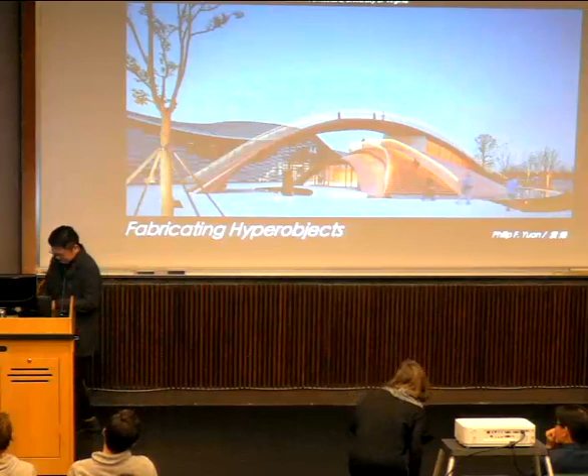Thank you so much for the generous introduction from Dean Ila. Good evening, everyone. It's a great honor for me to be appointed as Thomas Jefferson visiting professor at UVA, and thanks to Dean Ila for your kind invitation. I really appreciate your vision, leadership, and support, not only for the new development of digital technology, but also the important cultural communication in architecture.

I would also like to thank Professor Li Shiqiao and Esther Lawrence for their special hosting. Shiqiao is admired as the first and best Chinese scholar who graduated from AA in the 1980s, a glorious time there, and he has a profound influence in mainland China, especially on Asian architecture and urban theory. I also thank Philippe for organizing the studio and inviting me to teach here this semester.

So it's a great opportunity and great honor for me to teach with Lucia. I think we have a fantastic studio, and we just finished the review. The students worked so hard - I'm so proud of all of your work.

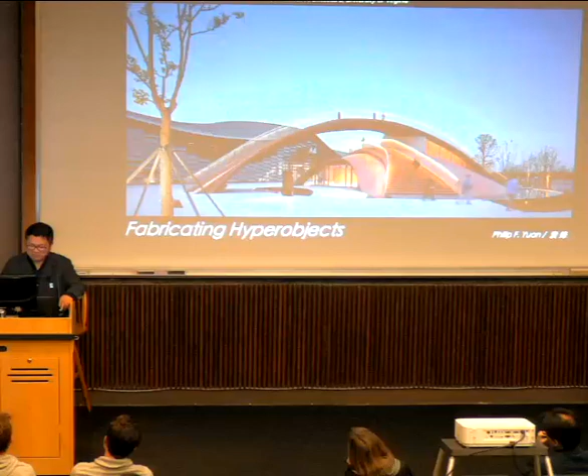10 years ago, I worked as a visiting scholar at MIT with Stanford Anderson, and we drove all the way to UVA. That was the first time for me to visit this great campus, which witnessed Thomas Jefferson's understanding of pedagogical campus space and the relationship between the human and natural - a very special prototype globally. This morning, I especially visited the great Monticello, which I hope will inform this lecture.

15 years ago, I founded Archi-Union Architects in Shanghai. Our office is a kind of representation of our understanding of how we would like to set up the relationship between us and the Shanghai urban culture. As the ivy grows in the outer courtyard of the office, we progressively make our dream through the expansion of this physical space.

The garden embraces the office, and the office also embraces the courtyard greeneries.

In ancient China, a garden is not only a physical space for leisure, but also a dream space reflecting a holistic view of harmony between body and nature. Ji Cheng, a gardener of the Ming Dynasty, in his book Yuanye, proposed concepts such as borrowing scenery and adapting to local conditions, representing this holistic view of human and nature. A garden is not isolated from the outside world; rather, it is an extension of limited human space, forming a continued artificial connection between the human body and the surrounding world.

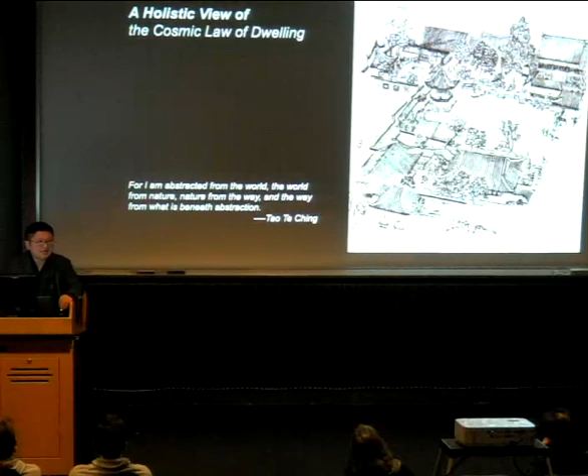Dian Chunyi is a garden inside the Master of the Nets Garden, which, although not the largest, is one of the most representative gardens in Suzhou. The Metropolitan Museum also has a version of this garden, named Ming Xuan, reproduced on the second floor in New York City. Recently, Luca Molinari, former curator of the Milan Triennale, curated a special contemporary exhibition in this garden, which I was also involved in.

Through robotic plastic printing technology, we created an artificial stone and embedded it into the context of Dian Chunyi. In this view, we can see three different rockeries from three different time periods. The middle one is real, a naturally formed Taihu rockery from the Ming Dynasty. The upper one is an artificial craft stone made during the Republic of China period. And the lower one is from our exhibition, made using recycled plastic.

We were thinking about this kind of post-humanism, what we can produce right now as part of the traditional Chinese garden. We implemented robotics to print this big rockery in just two days. By engaging in the continuous making process of the garden, we wanted to propose a contemporary view on the relationship between the artificial and the natural.

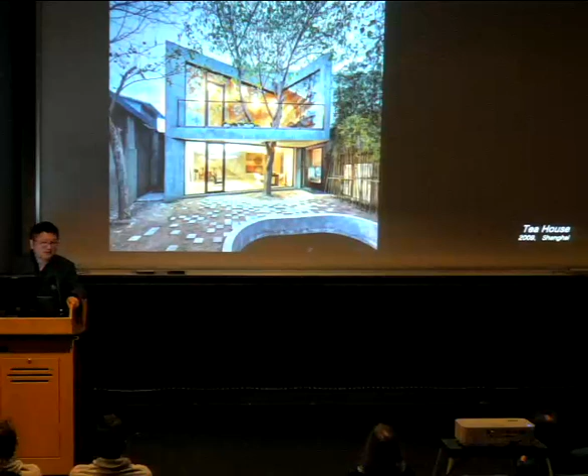Here is another story about the tea house, located in the backyard of the Archi-Union office, constructed in 2009—almost 10 years ago—from the salvaged parts of the original warehouse's collapsed roof. The site was extremely restricted, with a wall on three sides and only one side facing a special pond, where there was one tree. We did not cut down the tree; instead we tried to design a relationship engaging the new building with this original tree.

On the ground floor, the space faces the trunk of this big tree—you can see a very big trunk from the ground floor of the tea house. On the second floor, you experience the shadow of the leaves and the sunlight from outside, almost touching the leaves. There's another back space where you can see the leaves falling down onto the balcony on the second floor. It's a super small building, only about 120 square meters over 2 stories, but we found three ways to create a special relationship with just one big tree.

The interior space is interesting—we tried to embody harmony by integrating exposure and openness, a delightful space, logical construction, and other complicated relationships, with the building reacting to the site's environment. The main object in the tea house is a stair, integrating circulation with the background wall, which is also a stair, maximizing the amount of space and letting you experience the tree differently. It's one big object that, although in a super small space, dominates it and gives this small space a new spirit and new identity.

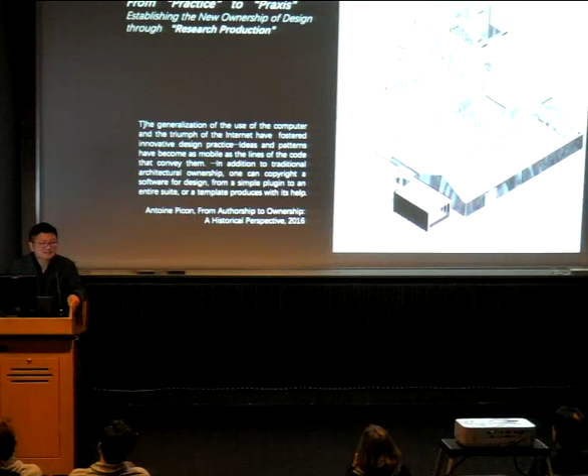It is supposed to be not just an architectural office, but a research laboratory as well. I'm trying to propose an alternative vision on architecture authorship, which could be established not just through design projects for the office, but more through a model of research production. In this sense, the traditional definition of architecture practice would be transferred to the praxis — a design application of knowledge.

In the past nine years, working together with Neil Leach, we've been setting up a particular research platform named DigitalFUTURES Shanghai, which is a PhD program, workshops, conference, and exhibition-based event. Every year we invite six to twelve teams tutored by experts from all over the world, including Philip Beesley, Tom Mann, Philippe Block, Achim Menges, who have been intensely packing everything, teaching together in two to three weeks, focusing on a certain research topic in computational design and robotic fabrication.

I think it's kind of a learning progress. Achim's team has come for five years, and Philippe Block for three years. I think it's a very interesting event — everyone teaching each other, learning from each other, sharing knowledge with each other. It's a totally open platform to all the community, the society.

So you can see the number of participants is increasing. The first year we only had 30 students participate in this event, but year by year the number grew bigger. This summer, four months ago, we had 220 students from 126 universities from all over the world participate in this special event. Our global partners who teach here number more than 40 teams, including from North America, South America, Europe, and Australia. So we're sharing this kind of open culture with each other — it's a great honor for us to have this special event.

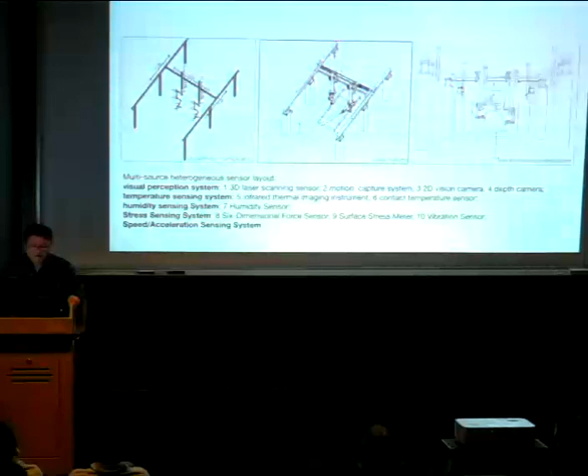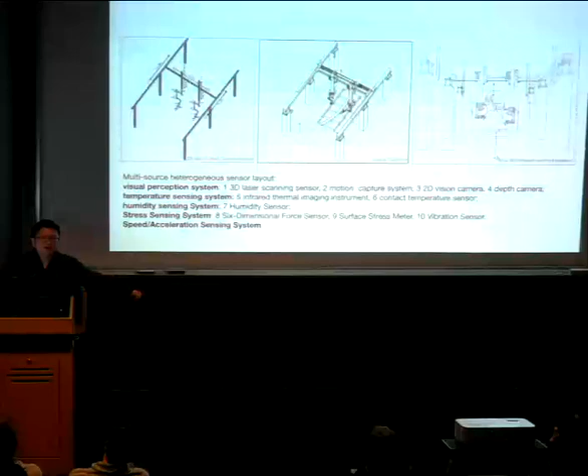I think the essential part for this is the spatial configuration, from configuration to the robotic platform, and we also put more than 10 different kinds of sensors into this platform. It's like robotics, like the extension of the human hand. You have 2 hands. One hand can carry 125 kilos, and the range of it is like 10 to 12 meters. So it's expanding the scale of the human body.

And we put sensors in it. It's like you have eyes, you have skin, you can touch, you can have real-time feedback. This is extremely important. This platform is expanding the human body in the construction, the experimental construction process.

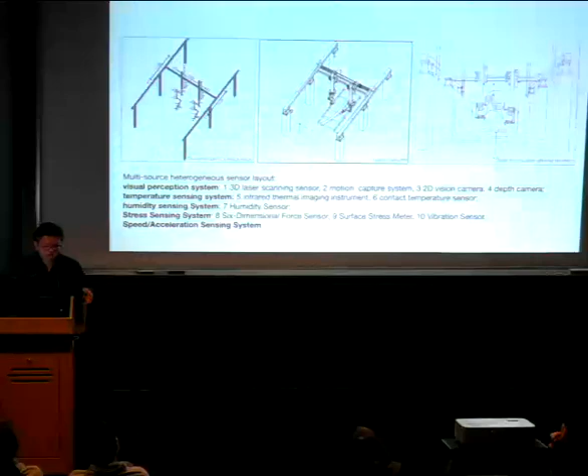And also some other theorists and philosophers coming, based on the theory of artificiality, astronomy, and automation, Benjamin Bratton's terraforming envisages a total transformation of the Earth's cities, technologies, and ecosystems.

The project takes a position of blurring the boundary between the artificial and the natural. It treats urban scale automation as part of the living ecology, and considers the city as a planetary network by which humans occupy the Earth as a surface.

In a way, we try to outline a planetary design initiative for the next century.

Stiegler, I invited him to come to Tongji 3 times and teach in our PhD program. And he's sharing a similar holistic view.

Stiegler addressed the globalization of exchange due to global communication networks, the worldwide internet, the GPS system, and the cloud, etc. He sees the network as a planetary infrastructure allowing the permanent interconnection of 2.5 billion individuals, whose activities are systematic traces treated by intensive computing.

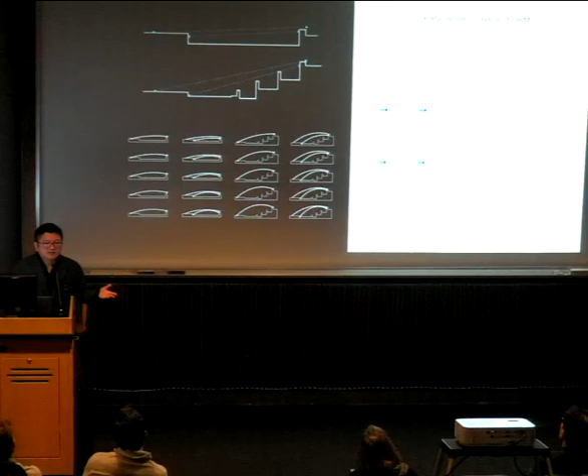The catenary is developed by the structural engineer, but architects right now can implement it in the design process. Then we use Millipede, which is a structure optimization software, based on topological optimization methodology, to remove unnecessary material in the construction.

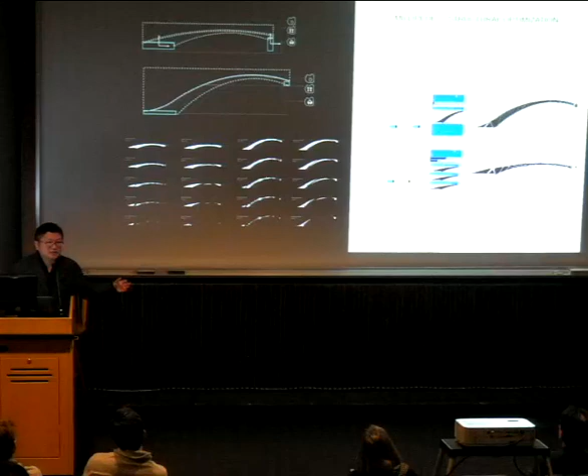To do that, we also need to set up boundary conditions and remove the unuseful material, and finally we find the useful material. Most importantly, we implement robotics and 3D printing, the forces followed by the density of the material, and the print material is the structural material. This is totally based on parallel fabrication on the university platform and also the Fab-Union platform.

This is testing, Patrik Schumacher coming into our workshop. We're working through it. This is the first year standing on it. Maximum we're standing 5 people on this plastic bridge. It is a pedestrian bridge, totally done by my students.

But because of the hot weather, unfortunately after 45 days that year, 2017, it was extremely hot in summer, 42 degrees. We were testing it, detecting every day. The top of it was like 72 degrees, and the bottom of it like 39 degrees. The temperature difference made a huge transformation in the geometry of the bridge, so it broke down. We learned a lot through this failure, the first year.

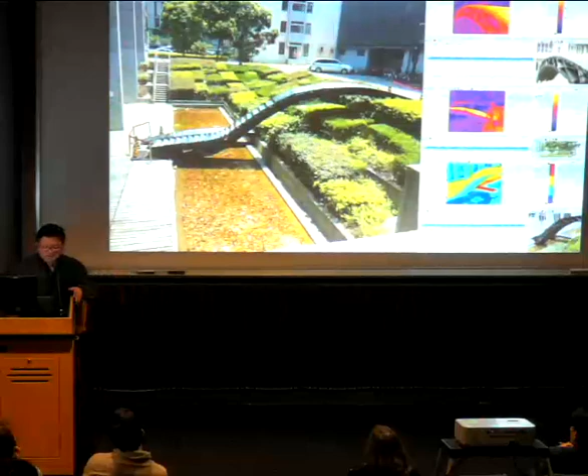And this is the second year, 2018. We actually invited Wang Shu, who is a Pritzker Prize winner, and Meejin Yoon and Nader Tehrani coming to make keynote speeches at the Digital Future event. How many, 7 people standing on it. This is a totally updated version for the efficiency of the bridge.

The technology we implement this time is 3D welding by robotics. It's like point-by-point welding, with a structure optimization system optimized by different softwares. It's interesting, everything finished in two weeks and a half. This was a workshop for making this special bridge.

And Wang Shu told me he is very interested, maybe not in the process of how to make it, but he is interested in this kind of detail which has a certain quality of craftsmanship, totally done by robotics. It looks not precisely accurate, but has this kind of very interesting detail. It's not made by a human being, it's made by a machine, so it's a collaboration between robotics and the human being. That is what we name cyber.

It's a cyber future. This is this year. You can count how many people are standing on it. So it's a learning curve, right? Over 3 years, from 5 people to like 20 people can stand on it.

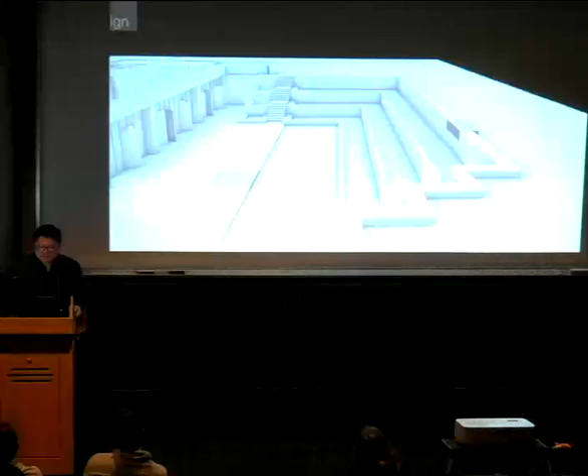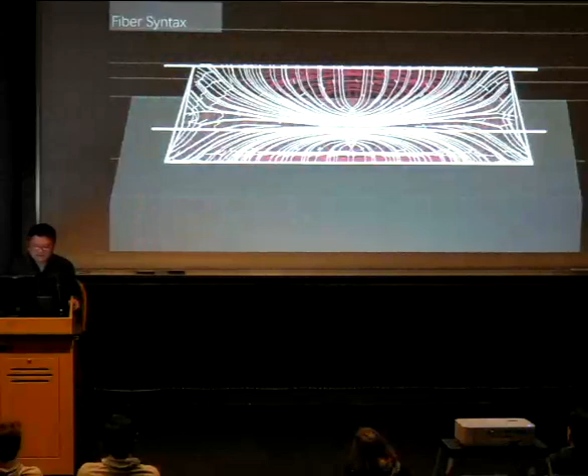So it is not one material, we use 3 kinds of material, including steel metal welding, carbon fiber, and glass fiber. So it's an integrated material. The robotic 3D metal printing offers more freedom back to the designers, with excellent strength-to-weight ratios.

And this is a weaving for each local step, 3D welding and robotic weaving. With excellent strength to weight ratio, and scale limitation determined by the robotic reachability as a production method, robotics filament weaving technology becomes a great method for the geometry of local structures like the stairs and the handrails.

Through the composite structure, the joints research aims to maximize structural performance and minimize material usage. So the weight of the bridge is only 450 kilos, but 20 people can stand on it, so it's an extremely high performance bridge.

You can see we invented all these tools, and the whole process is simulated and fabricated by the robotic platform. It's carbon fiber for the compression and glass fiber for tension. This is a gantry robotic system. We record the whole process, and all of it is done by the students, the graduate students.

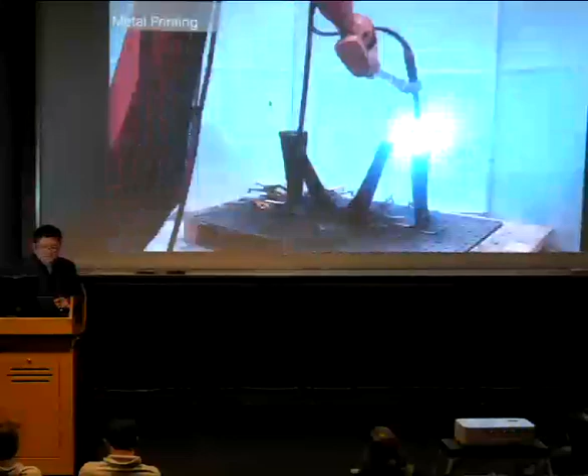All the segments are pre-assembled into 3 parts, the stairs - actually we have 18 stairs - and then we put them together before the final day. So you can see the details, and also you can see this kind of welding detail made by the robotics.

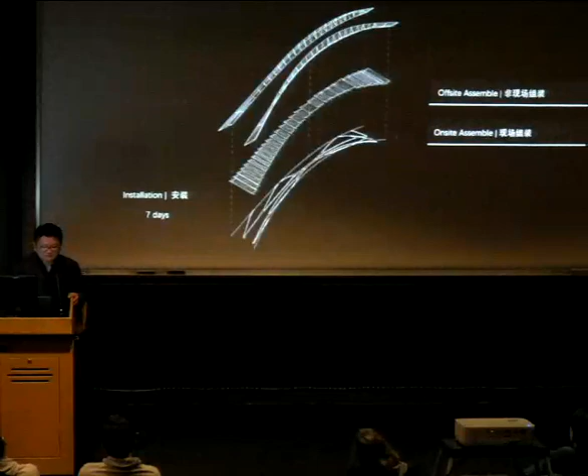So it's 3 layers. We have a support system, which is 3D welding, and now we have the handrails and the stairs, right?

So it's a skeleton with different kinds of muscles on it, like 3 layers of a system. We do everything very intensely in 2 weeks. We fabricate them in our school. It's like an event, a special event every year to present our research and our special tests through the same topic of research.

So this one we name like one object. You can see the material and the details are totally recreated and fabricated by the material performance, right? So the bridge created by different material is actually a totally experimental research process.

So the ultimate objective of research is to experiment, and through experimentation, to establish a kind of credibility, so as to analog the scientific laboratory, the design laboratory would lead to a rethinking on the traditional authority of architecture design.

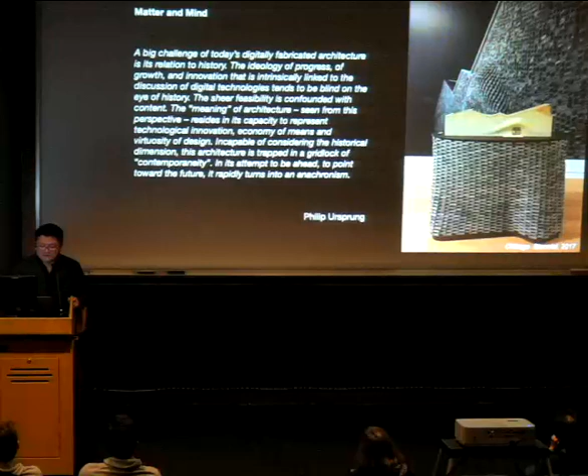Professor Philip Ursprung, who is the dean of ETH, recognized this project as a piece of matter and mind, as he mentioned, because he can read not only the technology but also the culture, some cultural aspects.

So the most important thing, we put sensors on the robotics, which scan and recognize and provide real-time feedback of the unique characteristics of each non-standard recycled brick, which helps us precisely place each brick to achieve the global geometry form, piece by piece.

The coexistence of roughness and accuracy is what we would like to express during the collaboration between human emotions and machinic intelligence.

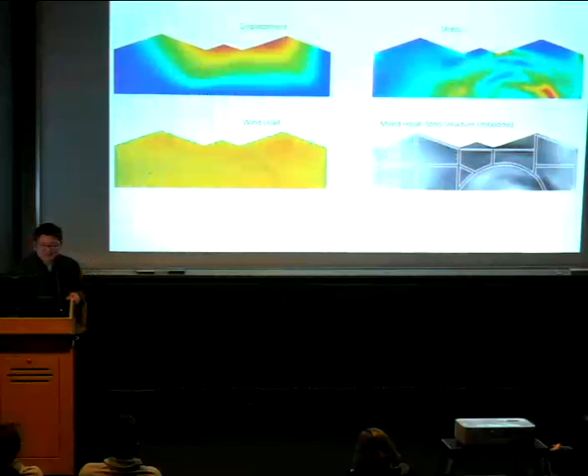So the most important thing, we program everything, every piece of the stone, totally based on simulation tools. You can see the displacement, the stress, and also the wind load, which are all parameters translated to the density of the material. We translate that density to position them in different places using robotics.

So the interior space has light and a very small footprint, but we find special quality based on this connection to the context. Another project with this kind of continuous gradient changes is the Fab-Union space.

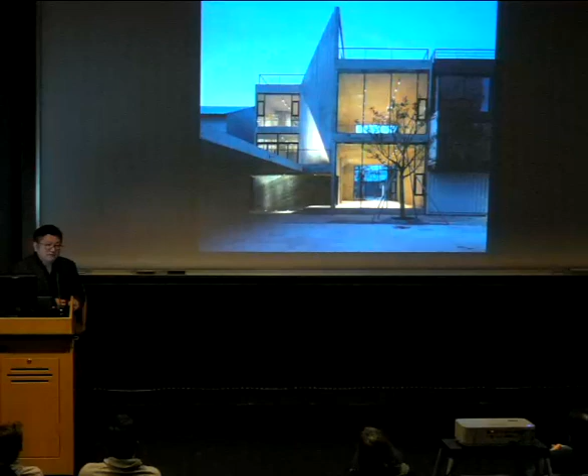The Shanghai government developed the West Bund, which is a very popular space right now in Shanghai, and gave 5 architects and 5 artists special spaces, and we organize different events there. We can use the space for 5 years, so it's an interesting special event in Shanghai. Fab-Union belongs to our team, so we actually set up a lot of exhibitions there. Everything was constructed in 4 months, including design.

So it's extremely short time. The space comes from the program. Actually, we have 2 higher spaces, a 5-meter space and a 3.3-meter space, and we just gave 3 meters in the middle to set up the circulation and the very special space in the middle to design everything.

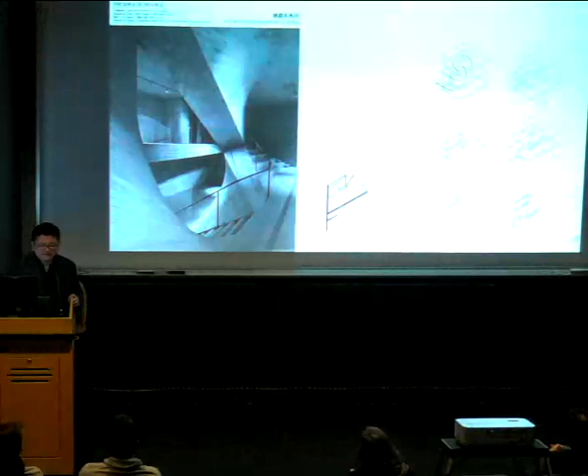So this is the circulation. We integrate all the different kinds of platforms. The most important thing, teaching my students in the studio, is to use the same methodology.

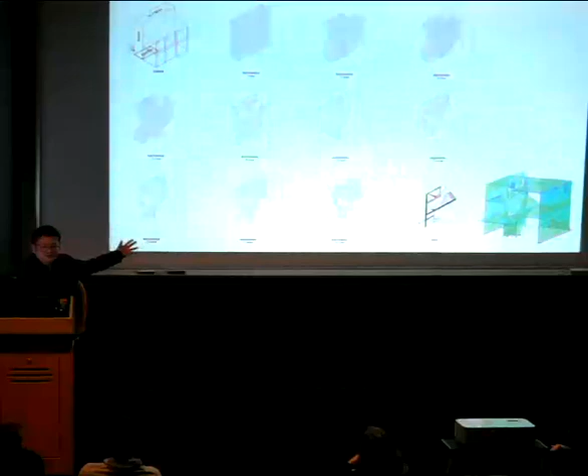We use Ameba to optimize the structure, deleting unuseful concrete generation by generation. The iteration has 84 or 82 generations. Afterwards, we translate this kind of geometry and polish them into a support system.

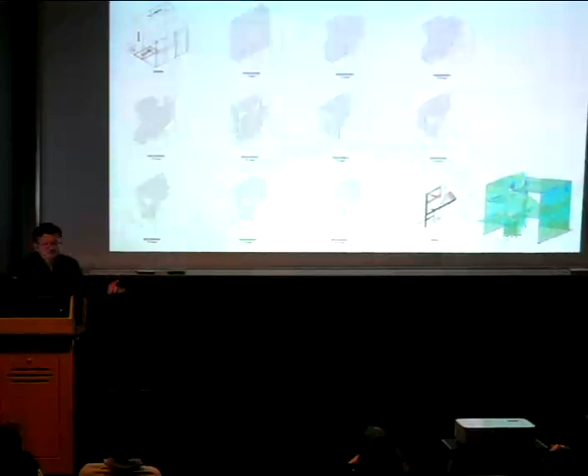And the bottom right is traditional structure software to prove what we're doing is right. So with Ameba, it's totally new software, but we optimize and delete unuseful material and try to create a new kind of experience space inside.

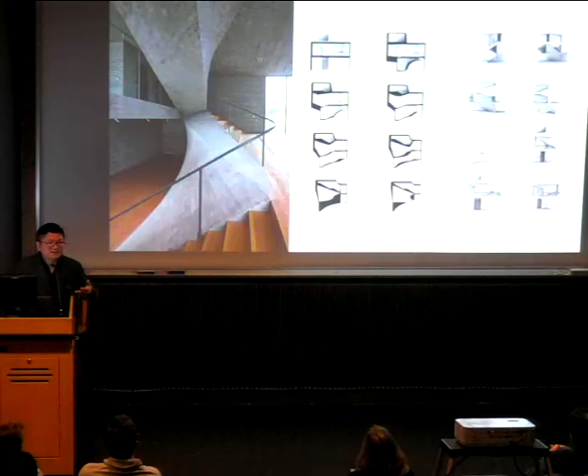So the construction process is really complicated in a very short time. We made a lot of sections, but the workers cannot read these kinds of sections. The only way to teach them how to construct it is by models, actually. So the plans are difficult to position, but spatially, just using models, we teach them on the site.

So after construction, you find the space quality is totally different. The wall is maybe not just a straight wall; it could be like a folding curvature wall because the forces are flowing. The support point is here. It's like a big diagonal linear space which supports the second floor. And the second floor is something like this.

We have outer space and some stairs inside the big volume, so it's like a transform from one point to the other. It's totally redefined the space by the structural performance. I like this image because we have light washing the concrete from the right hand, and on the left we have a parallel light also washing the concrete. Although the space is extremely small, just 14 meters, we have two kinds of light and a very special structure system, which gives us a totally different experience.

So we organize different kinds of events there, including different artists. Right now there's a structure and furniture designers exhibition which opened two days ago in this space. I think it becomes an open platform, not just because of design, but it's kind of communication, dialogue, and collaboration with different designers and the new generation. So we try to promote this kind of new technology, which has a profound influence in the big society.

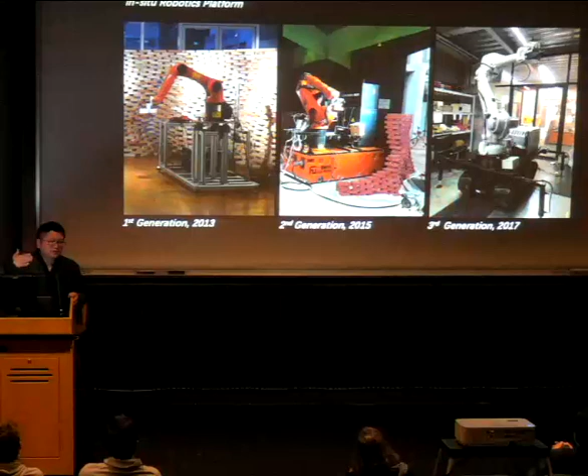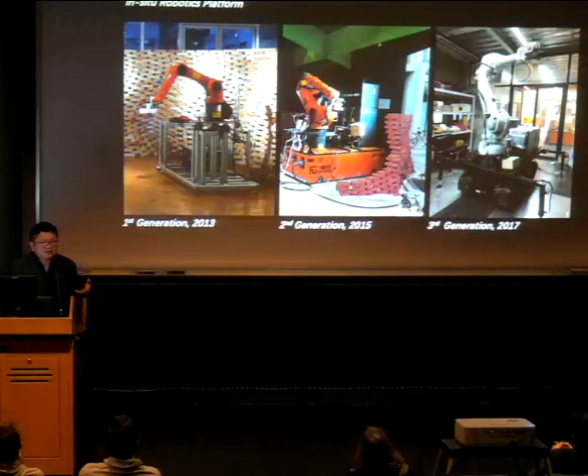We set up the prefabrication platform, and generation by generation, we have some in-situ robotic platforms. This is three generations - actually right now we have the fifth one, which can climb the scaffolding. It's a generation-by-generation iteration of this kind of platform, which is extremely important to the authorship because we're not just designing the project. We help the fabricator, the contractor, think about how to construct the buildings using different methodologies.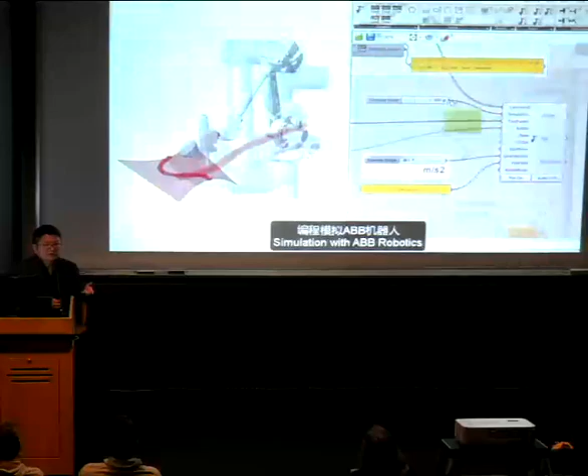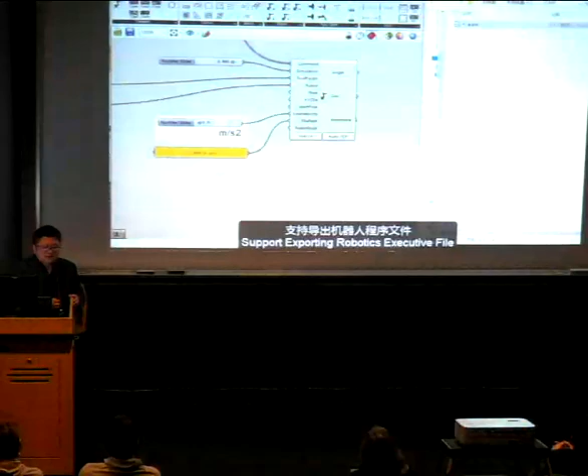Also in the last 10 years, we developed a FU robot, and this time we open this platform to my students here in the studio. I think it's based on long-term work by my PhD students - more than 5 students working on that, for around 6-7 years. We started 10 years ago, but actually working on it for about 6-7 years.

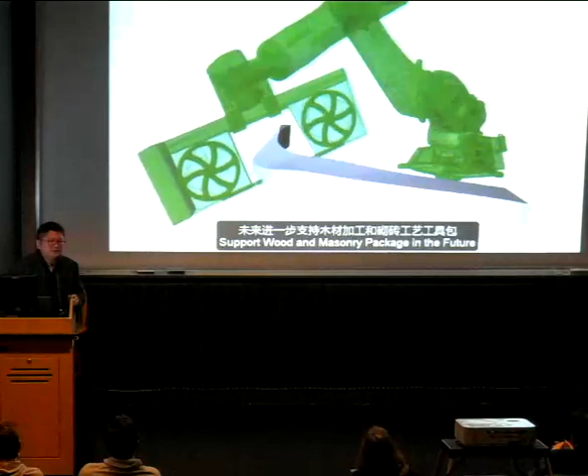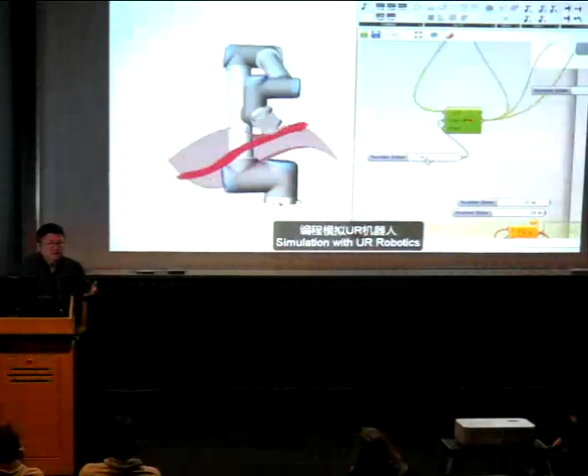We program all these kinds of tools, craftsmanship, the extruders on this platform. Anyone who would like to use it, we can just open everything to them. It's like a total shortcut to use this kind of new technology.

So the FU robot is a visual simulation and control operation platform, which is seamlessly involved with the architectural geometry in Rhino and into the fabrication process. The Grasshopper plugin has real-time feedback, which is extremely helpful to the whole design process. Most importantly, it's a learning, sharing, and collaborating platform, because you can put your extruder, for example, on this platform, and others can learn it from you. So it becomes an open source platform to everyone.

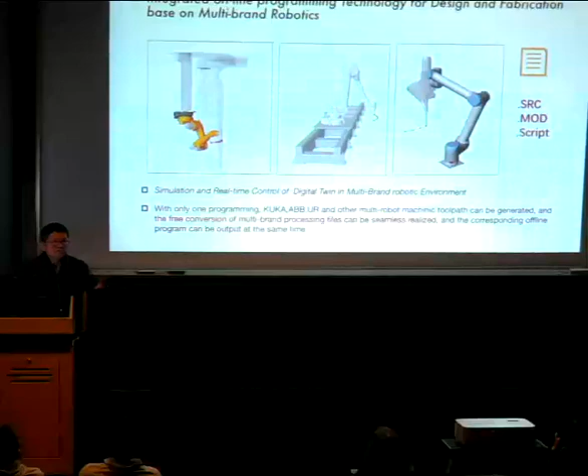Most importantly, we bridge not only KUKA, but also ABB and UR, which are different brands with totally different kinds of scripting, but we develop certain tools to bridge these different brands of robotics. That is fundamentally a very important platform, with an interface like this, categorized by different kinds of craftsmanship and different platforms.

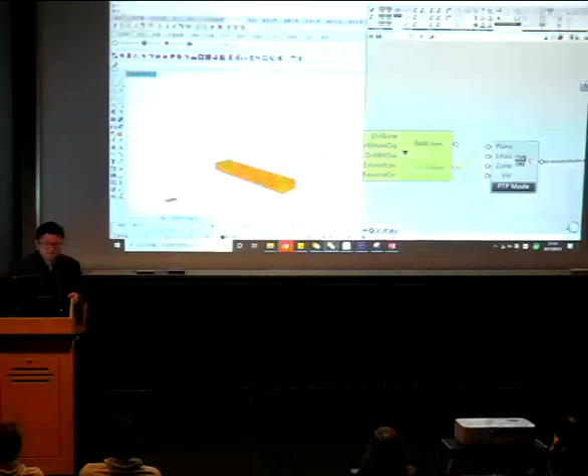This time the students use this kind of platform plugin with a bandsaw, flat saw, or milling machine, and everything is already programmed. Right now what we're doing is collaborating with different fabricators, and they can very quickly learn this new technology. For example, our most important collaborator, in Suzhou, by the end of this year will have 80 robotics in their timber structure factory, but they totally use this FU robot platform.

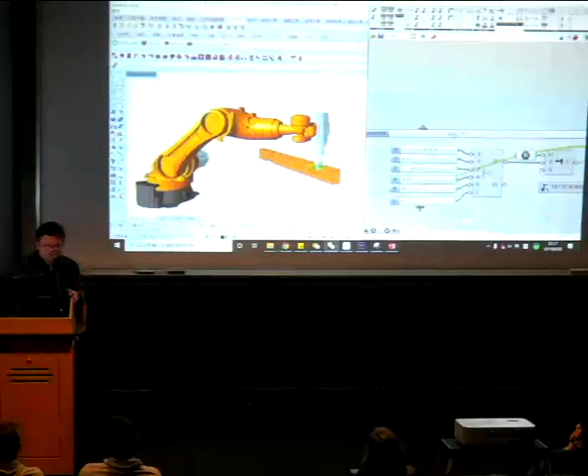So that is what I'm talking about regarding authorship - I'm not just talking about design. This is based on the PhD program, which is research, and Fab-Union every year supports back the PhD program. So it's like a very interesting ecosystem from research to practice.

In this situation, we create a mutual cultivating relationship between design research and building practice. Latour's notion is that a scientific result would only have meaning through its position in a network. Then the meaning of design research would only be realized through its relation to the practice network. Otherwise, it's just on paper - paper architecture, right? But this is how we bridge research to design quality. These are the two different things we want to talk about, and this is what I already mentioned about Venice Biennale.

We competed for this project last year. In China, we have an extremely big architect society, so we competed for this project because we have unique tools to make a different kind of design compared to other designers. The location of this pavilion is sitting at the end of the Virgin Garden of Arsenale, with our neighbor, the local Italian pavilion.

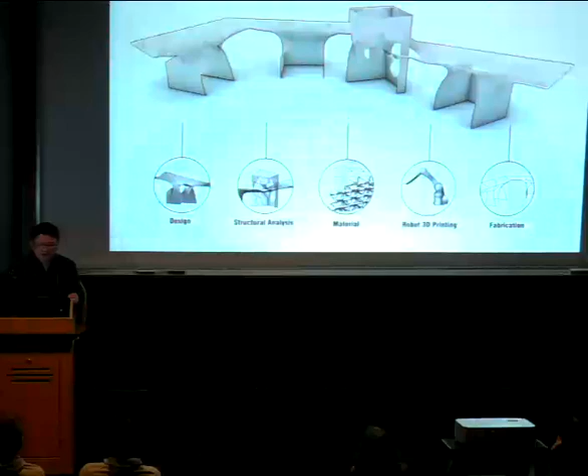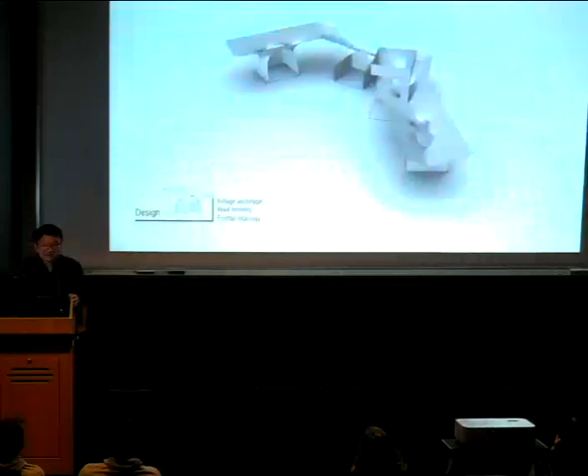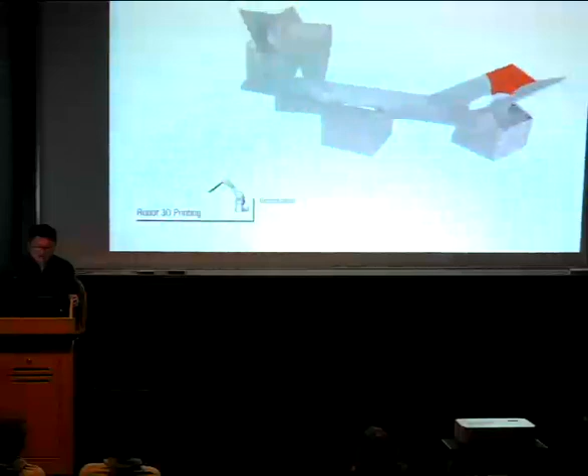To enhance the overall structural performance, a series of topological optimization algorithms was applied to optimize the form of the pavilion. The flat roof was turned into wave geometry based on the density of forces and the stiffness of the forces. So the structure was divided into 50 pieces, and we printed them pieces by pieces.

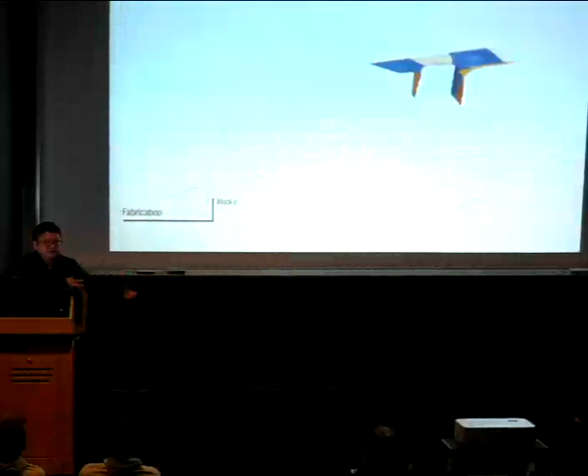The material we use is recycled material, which is environment-friendly, because plastic is a real critical problem right now to all of us. The technology we use, we call it digital twin—we have simulation tools and fabrication tools. We printed them in 50 pieces and assembled them on site.

So these are the 50 pieces, optimized during the design process. This is the fabrication process in our lab. We did research on the materials, testing different kinds of plastic, and finally found a very good performance material.

This is the printing process—it's autonomously printing spatially, point by point, with simulation and fabrication through a digital twin throughout the whole process. This is one of the largest pieces; we recorded the process of how to print them. It takes about 2 to 3 days to print the whole piece in the robotic lab.

Then we packed them into containers and transported them to Venice. The biggest difficulty in Venice is that we only have gondolas, so we had to move them from big ships to small ships. One of my PhD students worked with 6 graduate students together on this pavilion—it took about 7-8 days to finish fabricating everything.

So this is the process for this research project. Because Venice doesn't allow digging any foundation, we needed to put sand as a foundation, hidden in the bench, to balance the whole load and keep the safety of the pavilion.

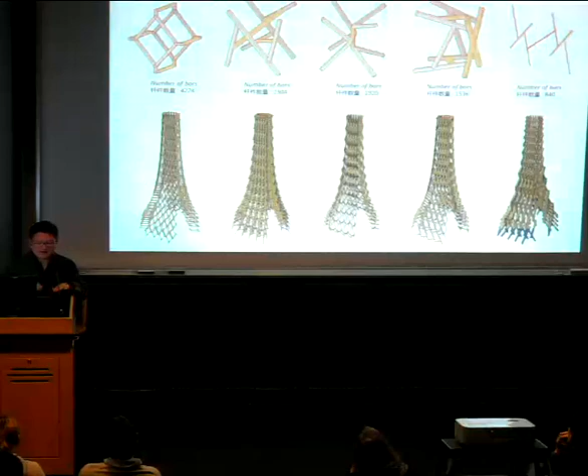More than 840 pieces, but everything was fabricated in 2 weeks and a half. This is the optimization process—we implemented bigger robotics so you can fabricate these components faster, based on computational design and robotic fabrication technology.

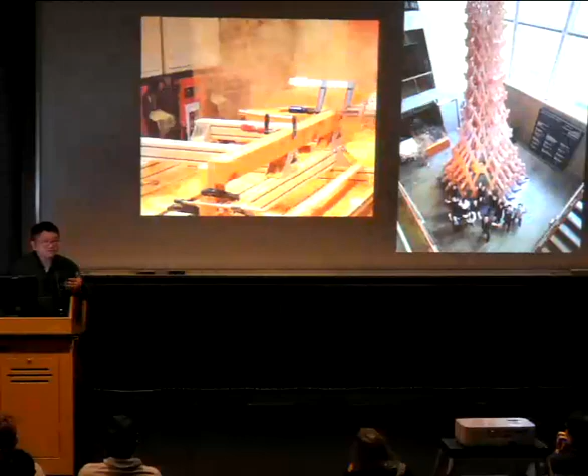The traditional crafts could be embedded into a new interface for human and computer collaboration. The students have no experience as carpenters, but they can control everything precisely. This is the process for all the technology right now—we're working together with the students here. In our studio, we try to fabricate these kinds of components using this same technology.

And this is a project we implemented through the research-to-real project. This is a special village located in Sichuan province, about 1.5 hours away from Chengdu. This project was invited to present at the Venice Biennale last year.

We designed only 6 buildings, which totally changed the identity and lifestyle in this small village, including a community center, an industry presenting center, different kinds of B&B, and a camping place.

The first time I was invited to the village, I was deeply moved by its historical environment and natural beauty. So what we designed uses materials very familiar to local people: tiles, timbers, and bamboo weaving on the facade. But the structure system is totally different.

We prefabricated everything near Shanghai and Suzhou, then transported all the components to the site using 6 big trucks. It's a prefabrication, and on-site work only took 52 days to construct this 1,800 square meter building. The meaningful part isn't just the form, but the working flow, and how we give a different kind of identity and quality to the rural area of China.

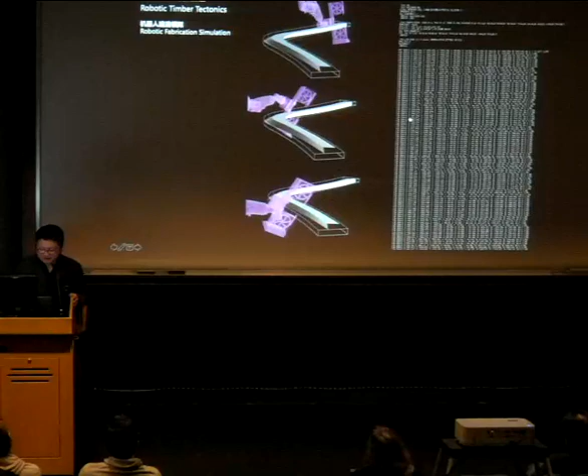Yeah, so that's the future we're talking about. In Bamboo is both hidden and visible — hidden in the bamboo forest, with the background still natural. You can see the traditional material, everything feels familiar, but everything is totally different.

We can see the quality of the fabrication gives us a strong opportunity. Everything stays the same — including the farming land allotments, which are still there, and people just farm surrounding this building. We also designed 6 or 8 B&B small buildings, each with a very small courtyard in the middle.

We implemented this kind of tile on top, and each courtyard has trees or a lotus in the middle. Local people told me it's super familiar to them, but also super different, because all these curvature roofs are prefabricated in the factory.

A lot of events and special activities happen in this village now. People gather and invite others, make performances here, and young children visit the community and organize different kinds of events. It's like the building changed what happens there.

This is an entrance pavilion. I made this model in one night, and the local master there hand-wove this special entrance pavilion based on it.

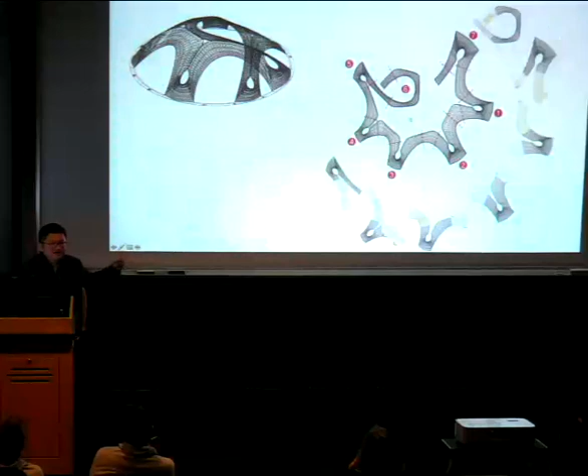So that's special, and this is an asymmetrical freeform arch generated by RhinoVAULT. RhinoVAULT is developed by Philippe Block, and our team's contribution is 3D printing this scaffolding in 8 hours, which is super efficient to support this whole system. We find printing the geometry in different ways can create different folding to generate different kinds of supporting form, with very strong stiffness.

MIT students, with my students, can sit on it - it's very strong. So what we're doing is printing them in a very short time, finding the geometry, and putting them on site. Then we put the tiles and brick on it, layer by layer - only 3 layers. You can see the space quality. After taking away the scaffolding, you can find this free-form geometry.

It's a kind of totally new technology. But the research is based on the collaboration between ETH, MIT, and Tongji, so it's a research project. Afterwards, after 6 months, still working with Philippe Block together - he's a very good, excellent structural engineer background architect.

So this time we're experimentally doing much bigger. The last one was 60 square meters surface, but this time we're going to another 600 meters. The Red Pavilion is built like 600 meters of surface. The design for the Red Pavilion started, I think, April this year, and finished like two months ago.

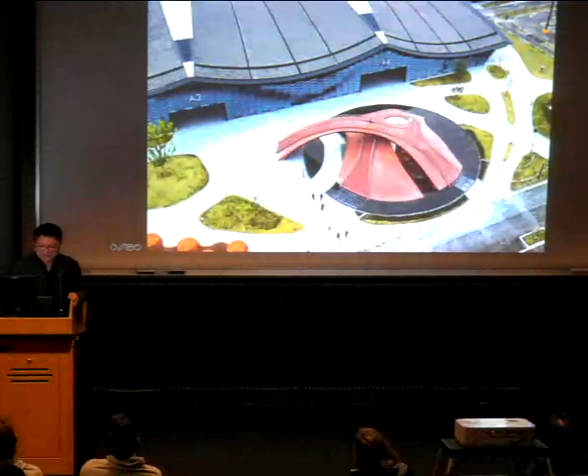The special thing about this pavilion is people can have a kind of special detour because it's located at another project I want to introduce later, which is a super big campus. But the special experience of visiting here is finding the position for observation from different heights. So this very small pavilion gives you the opportunity to walk spirally to find your position and take a look at the environment.

That has some connection to the China pavilion concept. In Chinese gardens, if you visit Suzhou, there are a lot of rockeries you can walk around, and you find a very small rockery has a very big meaning. They're talking about this kind of metaphor in Chinese tradition.

So this has multi-layers. We have scaffolding, we have some supporting structure, we have insulation - so everything is real. But the most special thing I want to tell you is we have only 3 layers of brick this time, and the span of the structure is 45 meters. I think it's the biggest rhino vault in the world we've constructed.

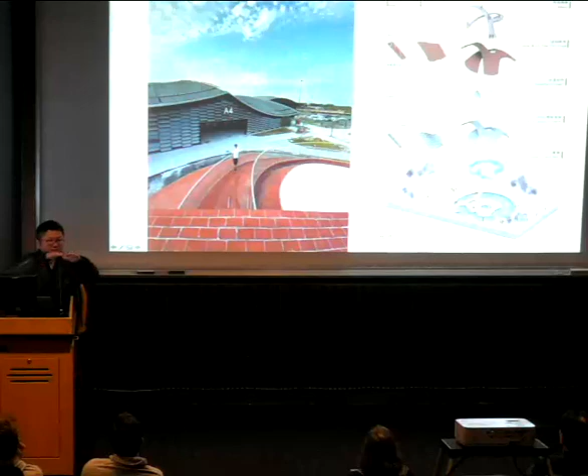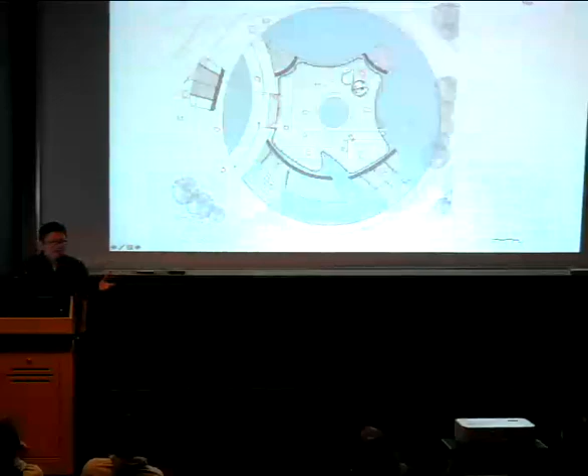This is the facade section for everything, surrounded and put them on the water. So this is an auditorium for special events for the international conference there. The reflection of the water lets you see the space have a special dialogue with the environment, and people can walk around in different positions to see the whole site.

So we have a special video for this one. The Red Pavilion is a large-scale brick shell, which is complicated and generated by the 3D equilibrium of compression structure action, and built with a novel 3D printed formwork system.

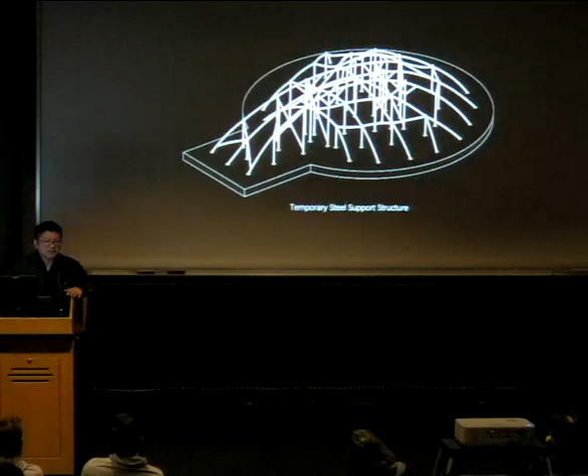So the fabrication process is with 3D printing reciprocal different components, which is a self-support system, and we also spray the insulation on top of it. Afterwards, we assemble them on site.

This project was finished when I was invited to teach here, actually, in the last few months, very fast.

You can see the brick, everything constructed layer by layer. Most importantly, there's no regulation for this building, so we tested the half load and the full load, 50 tons, meaning 400 people standing on it. That's an extremely dead load for earthquake resistance and anything else. We tested it, proved it, and showed it to different juries, passing the regulation. The people standing on it have an observation point through a very special structure system.

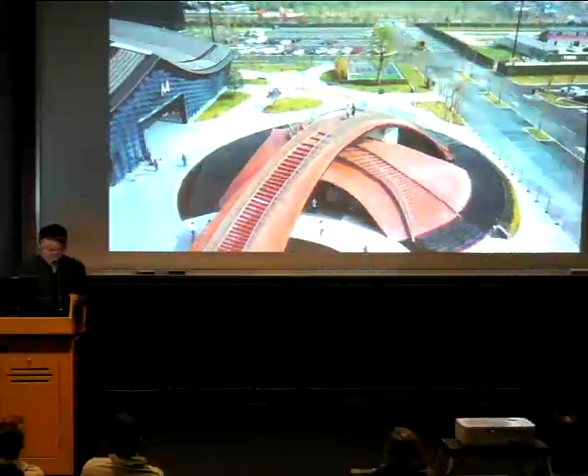This was newly finished just 1 or 2 months ago. The interior is an event space where we organize different kinds of exhibitions or lectures.

This is the 3D printing scaffolding. We did not take it away, we just put it there on the ceiling.

So this is a process I want to present here: from totally research work to the real project, which happened in 6 months. That small pavilion led to the big project, my office design, and in the last 6 months, after Chinese New Year in March, they approached us to design this super big project.

Wang Shu designed phase 1, which is something like here. This is the old town, and this is the boundary of the new town. They want to make a Wuzhen Internet conference space, expressing a new surrealism style endowed by the era of the south of the Yangtze River.

We named it Jiangnan. For the competition, a lot of teams, including GMP and other teams, participated. We proposed that the new building space here be defined as a stage for new activities in post-humanism.

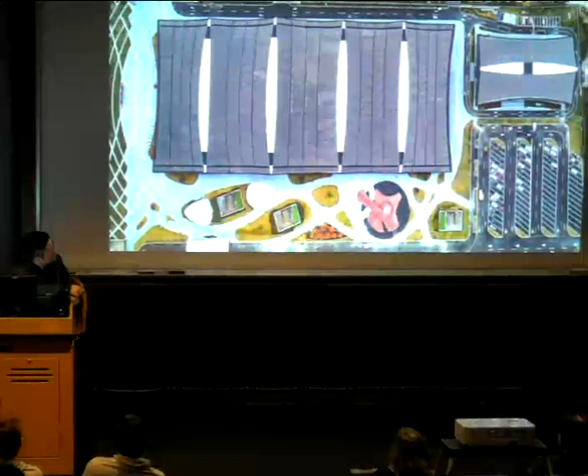The complex includes one big exhibition of 30,000 square meters, plus a conference center, and we designed 4 different pavilions. One uses brick and 3D printing technology, one uses brick masonry by robotics, one is a robotic timber structure, and one is plastic printing. So 4 pavilions testing 4 different technologies.

And the big one is also designed by my office.

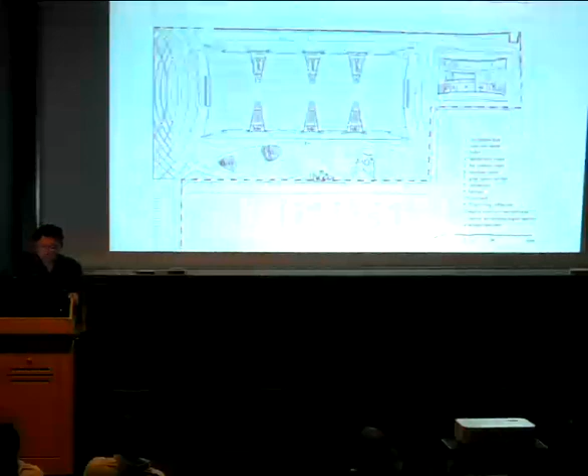In order to meet the functional requirements of the World Internet Conference and future different operation requirements, the whole building was divided into 4 exhibition spaces with different kinds of facility space subdivided within them.

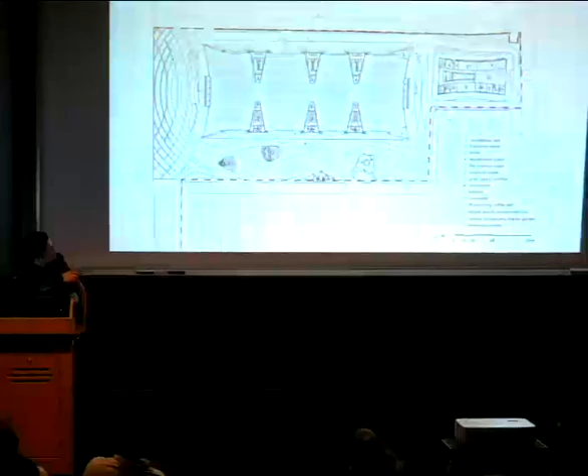But the most important thing I want to highlight is that the whole space has no column in the middle, because this roughly 100-meter span uses a kind of hanging suspension structure, so it's a continuous space with no column in the middle.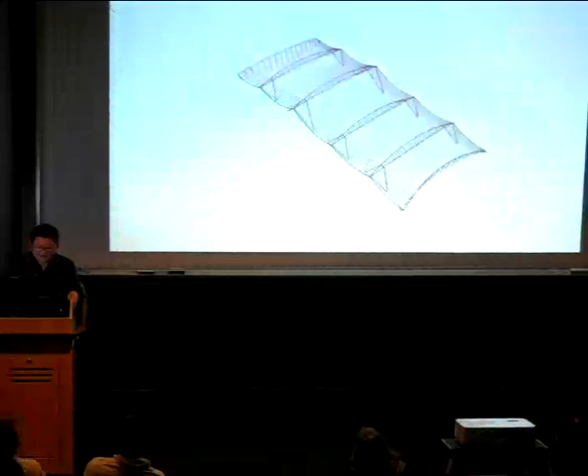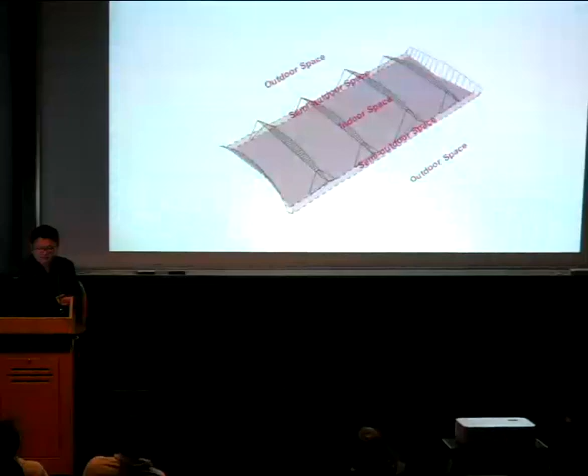In terms of structural efficiency, suspended roofs with suspension cables or steel strips require a lower amount of steel, but the construction control and detailed design of the flexible system are relatively complicated. So between the mainstream beams, we created and proposed a catenary beam made of a different kind of steel structure, with the structural prototype derived from suspension structure, different from conventional suspension structures.

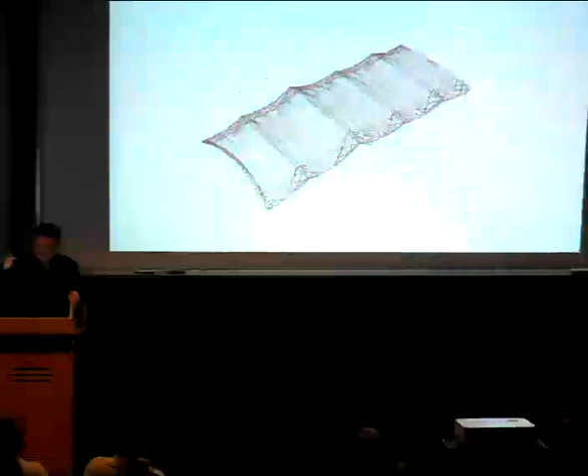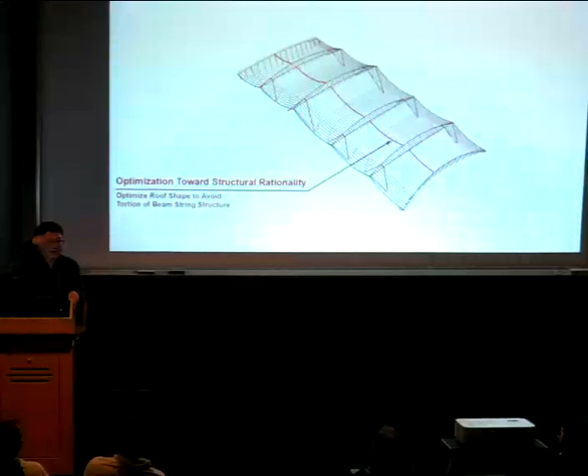Here we put tension on the steel to get the maximum mechanical property. This saves a lot of time in the form-finding process of the cable, replacing the steel cable with this kind of I-shaped beam to realize the complexity of form.

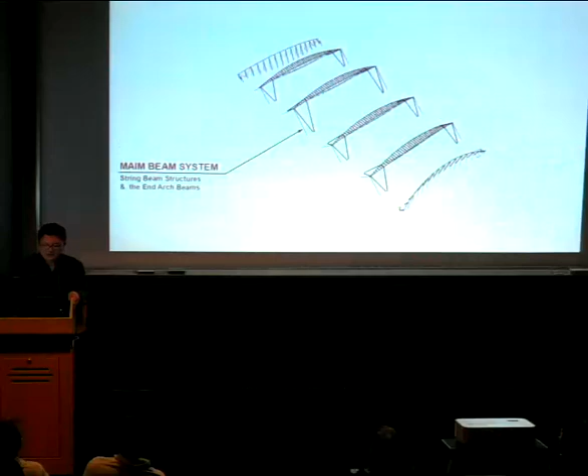More than 230 catenary beams are unified into circular segments with the same radius on the ceiling system, which is an extremely difficult structural system, but everything here was constructed in 6 months.

In order to achieve rapid construction of the entire pavilion, it needed to be lightweight and easy to position. The dynamic modular system and the logic of full prefabrication were applied to the overall scale construction of the entire pavilion project.

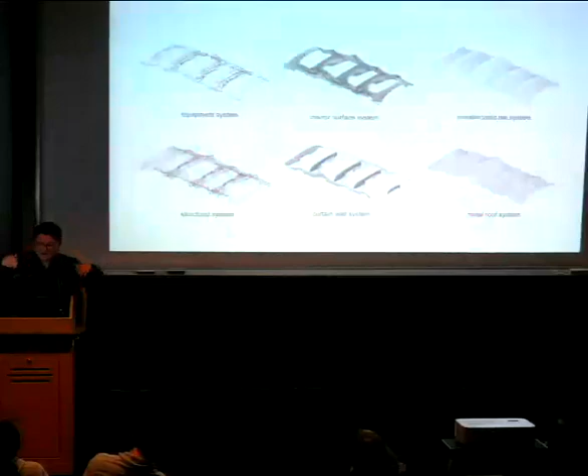The prefabricated upper building structure itself and 8 different columns support it from the site and generate the whole form, gradually breaking the mathematical logic.

The roof is 20,000 square meters, and we have 300,000 pieces of tiles, a traditional material, which we put on the roof.

I think the most important thing for the geometry is that the boundary is very low and the main beam is very high, so although it's a continuous building, we have different layers. You can see from the side it looks not like one big building, but like multi-layers of building.

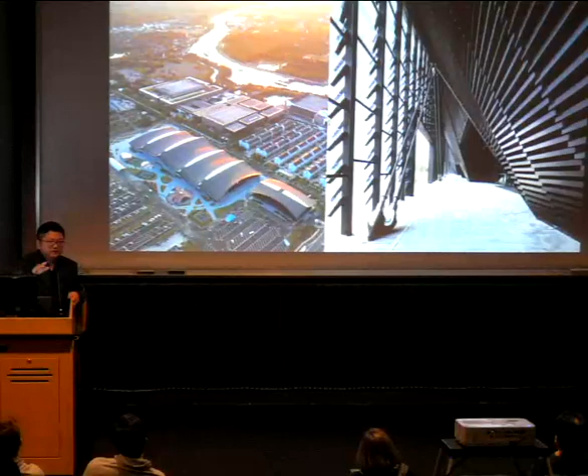This is the construction process. Everything is based on structure and architecture collaboration, so it's one system — precisely defined and accurately executed, making the construction process very reasonable in a very short time.

So this is after the fabrication construction. We can see the full pavilion with the whole environment.

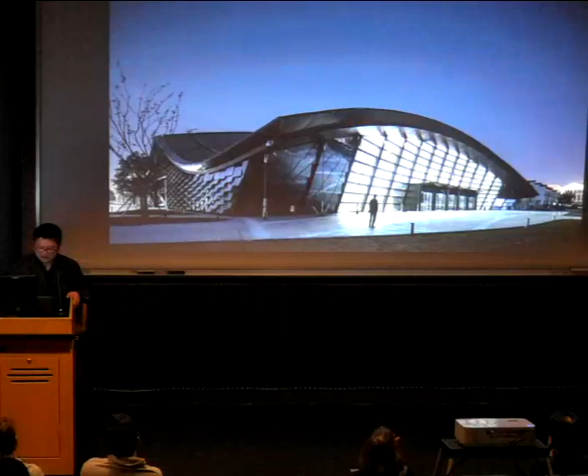So at night, it's semi-transparent. It's very light, like the roof is like a hyperobject hanging on top, but the building is transparent. This is the interior space, something like that. It's extremely 100 meters, 250 meters, this whole building, with the main beam on top and some catenary linear columns on top of the roof.

So for the fabrication, to make a conclusion, it has been developed to acquire an understanding of new materiality in architecture. I'd like to extend the subject matter to include not only the materialization process, but also the vision of design and construction as a foundation of the architecture discipline. Fabrication should not only be interpreted in terms of building technology, but also inherent in cultural and ethical aspects, like place identity and post-human identity.

In that sense, fabricating an architecture object becomes fabricating a hyperobject—an object, according to Timothy Morton, that is massively distributed in time and space relative to humans. Fabrication, as well as architecture, would become an entity moving beyond the individual physical object, beyond individual human cognition, eventually to be immersive with our social networks, our cultural context, and our natural environment.

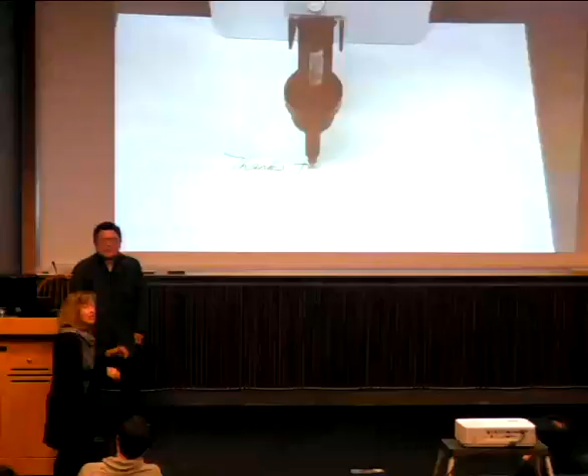Yeah, we can open it up for a few questions. I know it's all crystal clear to all of you.

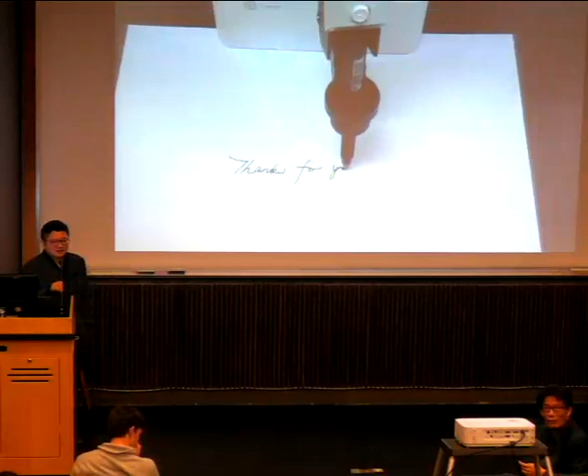So, in your firm, do you have your own structural engineer, or do you collaborate with one? Do you have a structural engineer in-house to work on that pavilion, or do you hire someone else?

Yes, we are a Class A design company in China, ranking at the different hierarchy. We are the toppest, so we have an in-house structural engineer, but at the same time we're collaborating with Mike Xie, with Philippe Block, with Bollinger—these kinds of worldwide known structural engineers. They give us some conceptual design, which is very important, and also we have the in-house structural engineer working with us.

That's because it's a super fast project. We must have someone working very detailed on everything. So I think the future is kind of an integration between architecture design and structural engineering design—it's not two disciplines right now.

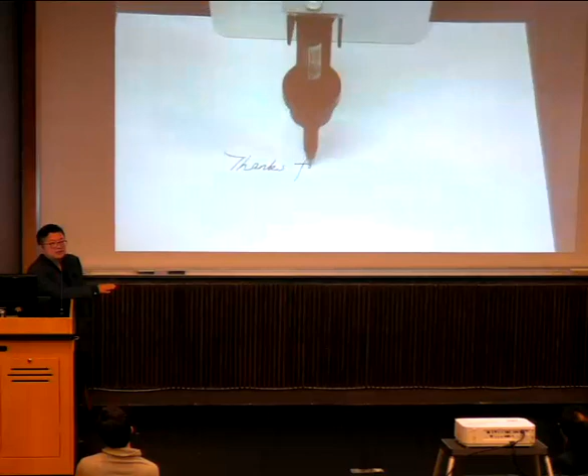Yes, because from what you showed, it seems like you don't need to design it—a generation from the software, then the structure shows up. Exactly.

Philip, well, first of all, thank you for a phenomenal lecture. It was really extremely powerful.

In many ways, you speak about this seamless relationship between architecture, engineering, and software. But also in many of your projects, there is a very clear reference to certain architectural predecessors that have either informed it or have certain formal similarities. So if you look at Eladio Dieste, for example, in Uruguay, and the curved brick wall that starts in a line and then becomes a curvature, or his famous warehouses—in many ways the last project you showed is an incredible take on that in a much more digitally sophisticated manner. So I wonder if you could speak a bit about, despite the shift in software, where do you think this continuum is, in terms of architects at the confluence of architecture and engineering—where do you fit within this larger continuum, and who are the figures you find most inspiring?

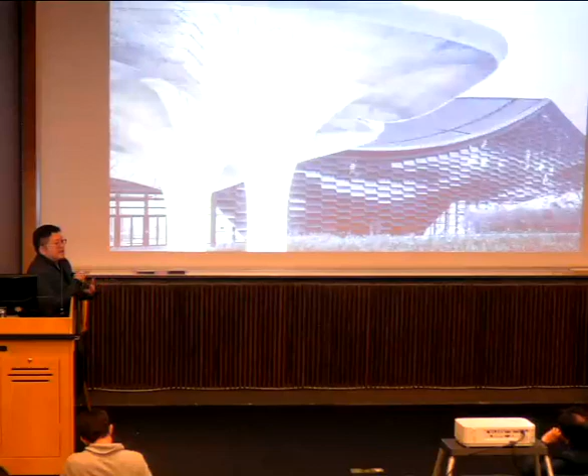So it's like a school or a firm is the same. I think reality is important and efficiency is important. That is the part where we should collaborate our intelligence with machine.

Based on that, I think each individual office will have its own style, because we still have human beings there. But our position and vision is we should open our mind to this new intelligence, including computation, including robotics, because this intelligence can expand our skills. It could make us more efficient in different projects, or help us make different kinds of paradigm shifts, based on different collaborative intelligence. So that is something I think for the pedagogy system, the same for the future.

It's like intelligence is part of the new future, which becomes a new authorship. Based on our PhD program, we have many international and local PhD students, and all of them have their special contribution based on this software culture, because they can have their own plugins—for example, a structural plugin or a robotic plugin file. That is their intelligence, making their contribution to society.

I think that intelligence can give us more possibility and make the problem more interesting. Not in the same way—maybe we open the window, and it can totally open a different solution based on different kinds of intelligence. So that is what we're very interested in.